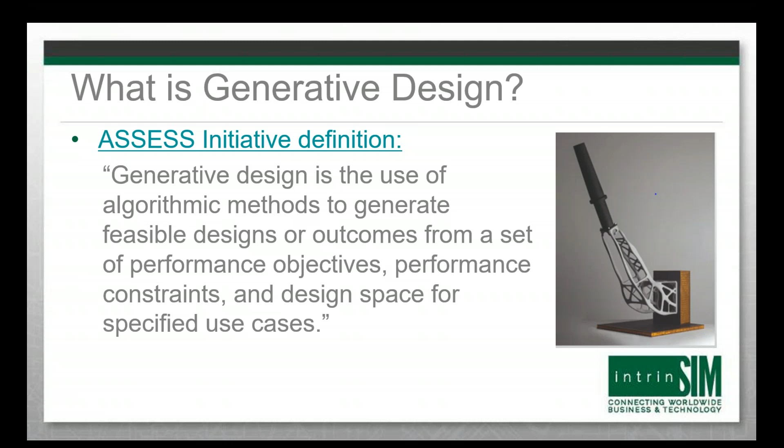The Assess Initiative goes on and describes that those objectives and constraints can include things from multiple areas, including performance, weight, mass, manufacturing, usability, aesthetics, ergonomics, and costs. I think ergonomics and aesthetics are a challenge yet to figure out how to quantify, but we see the whole aspect of generative design growing over time.

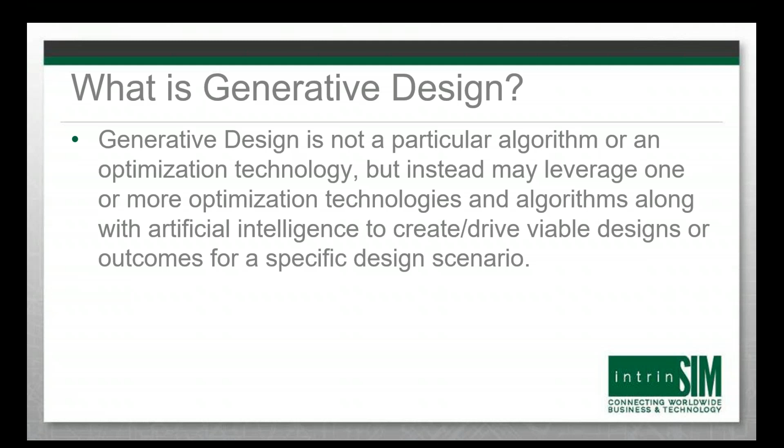So what's really important about the definition is generative design is not a particular algorithm or an optimization technology, but instead may leverage one or more optimization technologies and algorithms along with artificial intelligence to create or drive viable designs or outcomes for a specific design scenario. So what we're really going back to as a definition is the ability to algorithmically create designs given a set of criteria and a design scenario.

What this introduces is the possibility of a paradigm shift. This means that designs are generated by algorithms, so it enables exploration of a broader range of concepts that an individual would never have time to pursue. It enables generation of effective designs for different or multiple manufacturing processes. So it's actually possible to look at choosing the manufacturing process as part of the generative design space. It also enables significantly increased design innovation and performance-driven design very early in the design process, which dramatically reduces the design analysis cycles.

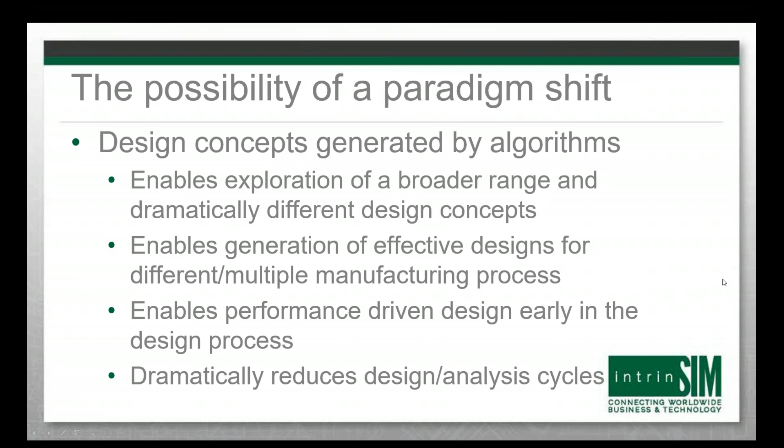This enables exploration of a broader range of concepts with dramatically different designs than we've worked with in the past, no longer minor tweaks of what was there before. So these things will reduce time, reduce cost, reduce weight, increase quality, and improve innovation, and therefore, by doing those things, improve competitiveness.

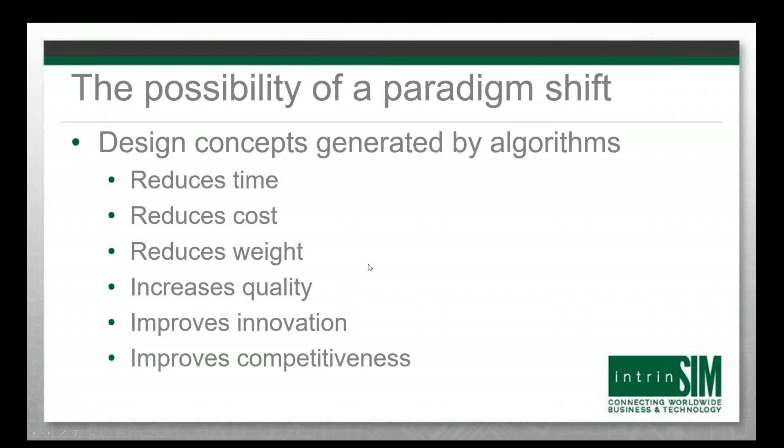So the Assess Initiative, working in collaboration with IntrinSim, has come up with a set of key capabilities necessary for software for general applicability. We're going to go through these in detail, but there are 11 capability areas. We've also come up with the concept of a capabilities assessment model.

We've indicated that if you're going to enable a paradigm shift, you have to consider organization and cultural changes. Due to time constraints, I'm not going to discuss those, that would be a webinar in itself. But let's acknowledge they're there, because if you implement generative design in a significant way, the roles of who's doing simulation and who's using it at what time will be changing, so it needs to be taken into consideration.

Who runs the generative design, for instance? So let's look through the different key capability areas that the software solutions need to provide, and that you need to consider as requirements, and what level of requirements your application needs.

So the first item is handling all appropriate objectives and constraints. Basically, the designer or design engineer doing conceptual design today is accounting for a variety of objectives and constraints without explicitly defining them to any software. To replace that effort with generative design, we have to be able to handle the same range of constraints and objectives that current designs work under.

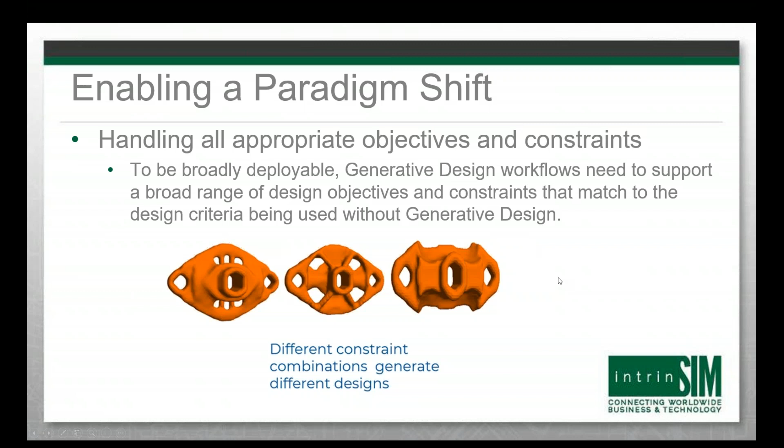The other issue we have to deal with is handling multiple operational or load conditions. Very rarely do we define anything that is a single load case. So generative design needs to intelligently work with multiple load conditions. It needs to be smarter than just adding in the material that any load case wanted, because that would be suboptimal. It has to intelligently manage the results so it accounts for the multiple load cases.

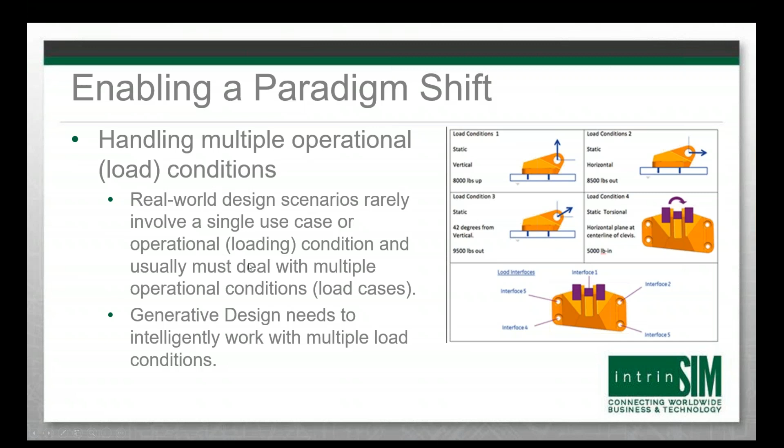We also have to handle all of the necessary physics to define the particular problem. To be broadly deployable, it needs to cover a very broad range of physics. When looking at generative design for your application, you need to understand which physics are necessary and make sure that the ones you need are actually covered by the generative design solution you're looking at.

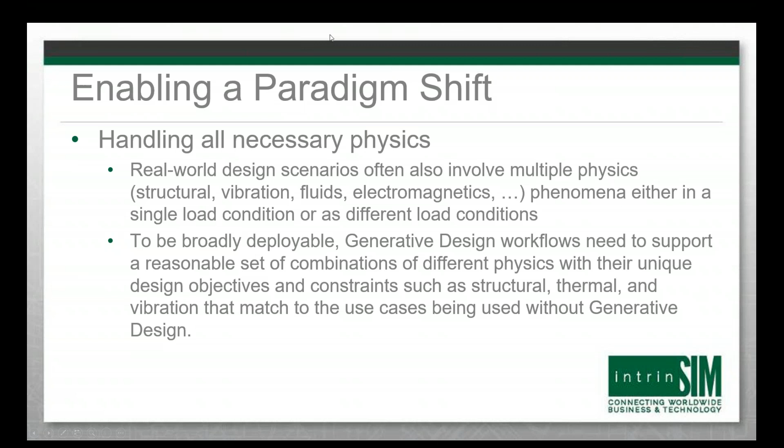Similar to load cases or physics, if you cannot cover them, then the designs you're generating are at best ideas to base things off of, and they're not directly usable as a design unless it covers the full range of what your scenario requires.

The other key item to enable a paradigm shift is handling multiple manufacturing processes. Everyone's enamored with additive manufacturing, and that opens up tremendous capabilities and options and innovation, but a significant amount of manufacturing today is still done with subtractive processes.

So we're really looking for things where the person running the generative design can choose which manufacturing processes are of interest and can compare different designs from different manufacturing processes. That would be the objective: to determine is there really a benefit for switching from a subtractive process to additive, or is it actually still cheaper to make this with subtractive manufacturing?

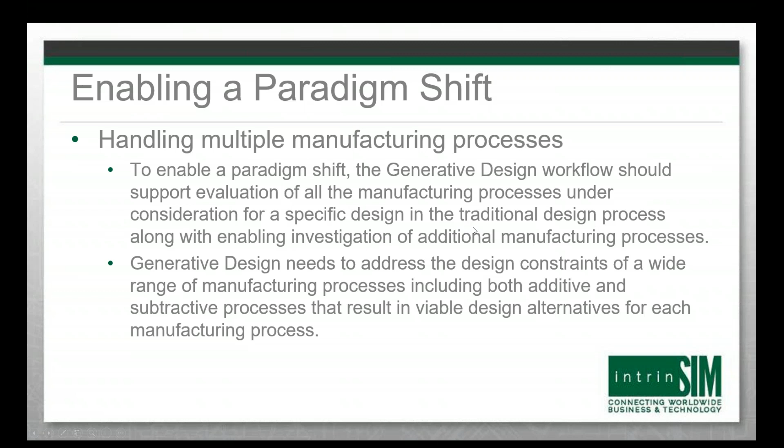And that brings up the other objective: to be truly effective and enable a paradigm shift, cost has to be accounted for in some manner. The actual number of parts you're making influences the cost, and we really aren't interested in generating beautiful, complicated designs we can't build because they're too expensive. So the ability to account for cost as a filter is a really important requirement to enable significant use of generative design, because that way you can compare the effectiveness of the actual manufacturing cost as part of the process.

We're also looking at handling generative design in an assembly or system context. This comes down to working at a component level and making sure you have the appropriate loads on the component that are generated from the system. This causes a limitation that requires a level of expertise to make sure the loads have been transferred correctly.

So you really want to be able to load at an assembly level and have the assembly work the loads down to the component you're working on. You also may want to do generative design of multiple components at once, because the load distribution will be a function of the stiffness, conductivity, or whatever the appropriate transport mechanism is for the physics you're looking at. It's very important to enable generative design at the assembly context, so you can load at the assembly level where it's more clearly understood what the input loadings are, and so you could actually do generative design on multiple components in the assembly.

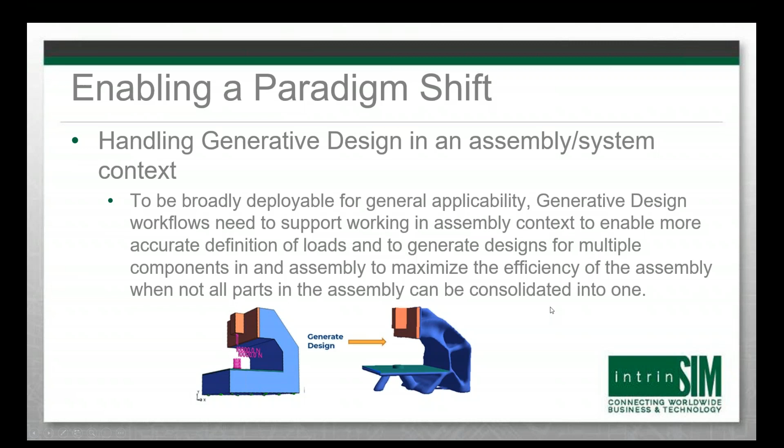The other key thing, if we're going to enable a paradigm shift with generative design, is the software needs to enable informed, comprehensive, and efficient exploration of the viable design alternatives. You should be able to look at a much wider range of design options than a human designer should be able to do, with efficient and effective tools to explore all the viable design options, with either single or multiple design objectives, so you can actually explore trade-offs from different constraints and objectives. We need to provide design exploration that's broader and more comprehensive than possible without generative design. The idea is to explore a broader space more efficiently.

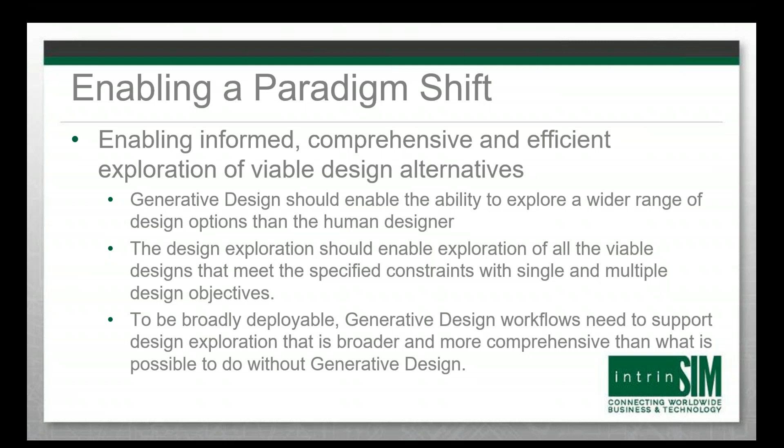That brings up the next key requirement: efficient selection. It doesn't do us any good to generate hundreds or thousands of possible design options from generative design. We need to find a way to work that down to a meaningful set, even though we may have described the problem such that there really are hundreds or thousands of viable designs. We need to include things like artificial intelligence or other approaches and filters so we can get down to a reasonable set of designs for the user to consider.

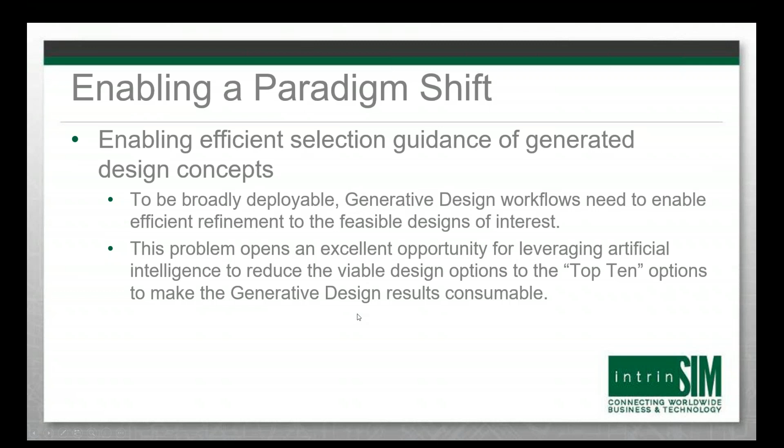Moving to thousands of designs does not save time, that just moves the effort to a different type of activity. So therefore there needs to be the ability to either control the number of designs created or bring them down to the meaningful designs so that quicker decisions can be made.

One of the key things is we expect generative design to be used in the early stages, the concept design stages or early stages of design, to be really effective. In order to do that, further validation, further detailed design, and further analysis is still required. So therefore, there needs to be an efficient and effective transformation to detailed design and analysis.

The ultimate goal is that transition is fully automated, so that not only the geometry comes along, but all of the loads, boundary conditions, the entire design scenario used for the generative design maps to the later stage validation and is capable for analysis at a standard finite element software solution. The idea is to enable that full transition, and the ultimate goal is for that transition to be completely and fully automated.

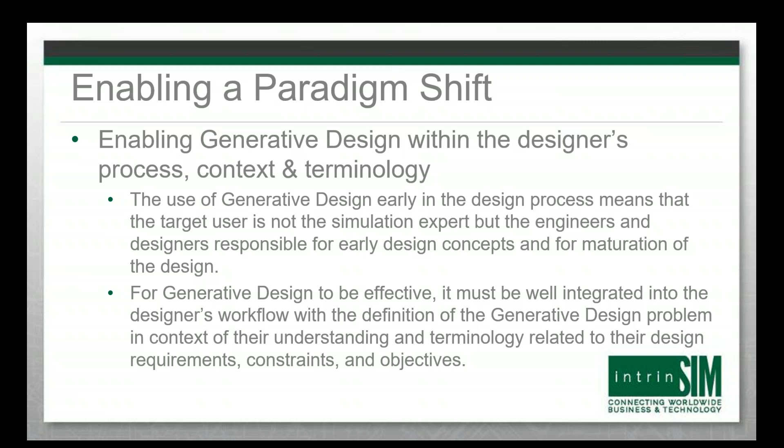The other key thing is, if we're going to move this earlier in the design process, the use of generative design means the target user is not the simulation expert, but the engineers and designers responsible for early design concepts and maturation of the design. So it has to be well integrated into the designer's workflow, or enable a workflow suitable for them, so these users actually have access to the software, are knowledgeable how to use it, and can leverage the data as an integral part of their design process.

It also needs to be broadly accessible, made available for all of those who might be involved in the paradigm shift. That means flexible licensing, easy access, easy setup. It needs to be available for a wide range of people.

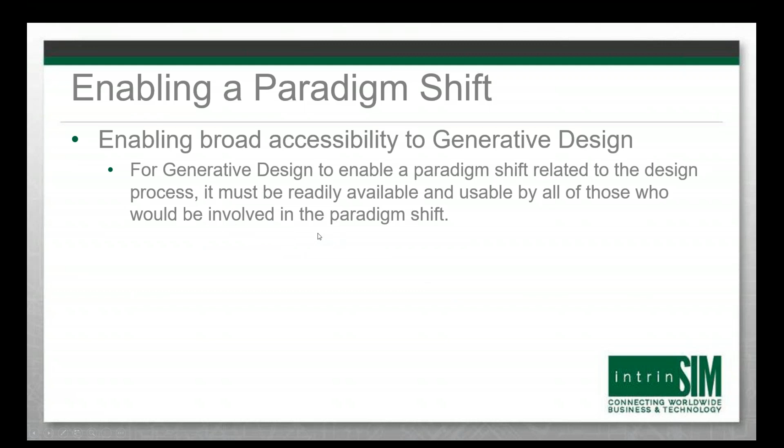So that covers, very quickly—probably a little quicker than I intended—the key capability areas required to enable a paradigm shift.

So in that process, IntrinSim and the Assess Initiative have also turned around. Once the capability areas have been developed, we actually developed a capability assessment model.

There is no generative design provider who meets the desired state of capabilities across the full range of required capabilities for all potential applications. Either they do everything required for a set of applications, or they do much of it, or they do it at a reasonable, functional level but don't capture everything.

I'm not going to go into details as to where Altair fits in this—they're going to talk to you about their software. What we are saying instead is there is no solution that offers generative design working across all capabilities at a perfect, comprehensive level for all potential applications.

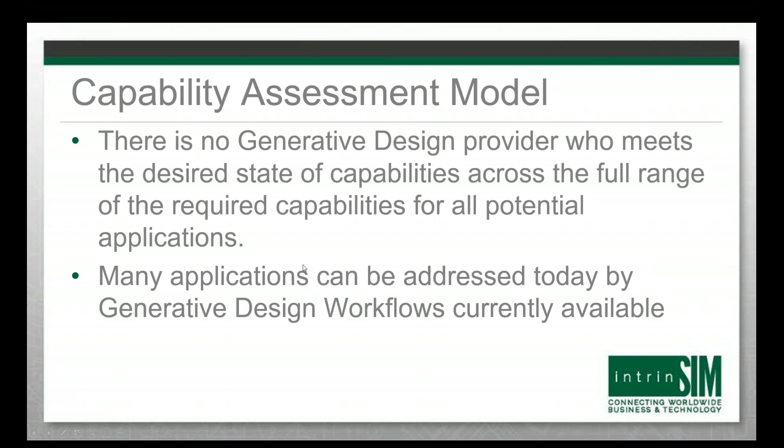So that's why we developed a capability assessment model, so we can determine where capabilities are and where requirements are. Many applications can be addressed today by the current workflows available, and you'll see great examples of that today.

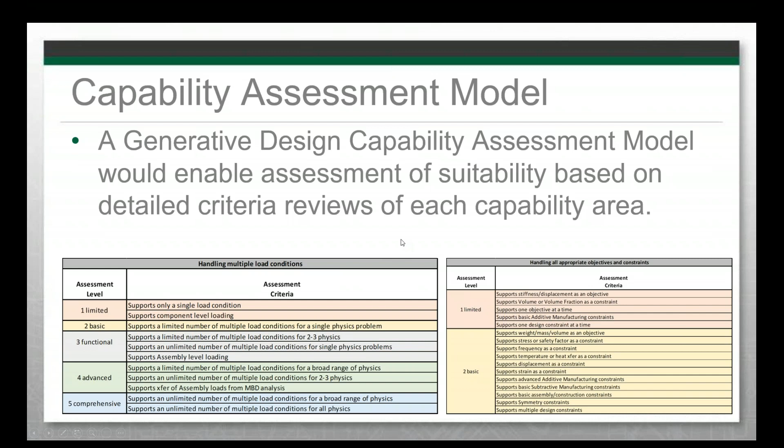Once the capability model has been created and assessed, it can be used to determine requirements for a particular design scenario. If you're interested in using generative design for a scenario, you look through all the key capability areas, checking physics capabilities, multiple load conditions, and how it matches against these criteria—then you do the same assessment, or have it done for you.

That indicates how a particular workflow handles the application. For a particular application, as shown on the right, looking at two applications, it's possible across all 11 areas to determine the suitability index, resulting in three states: one, clearly suitable, because the mean and minimum are acceptable.

The next state is possibly suitable and needs investigation—this is application 1's suitability, where the mean suitability index is greater than 1, but some criteria are not suitable and need investigation to see if they'll give you a problem. The third classification is clearly not suitable, where the mean is less than the desired 1.0 suitability index.

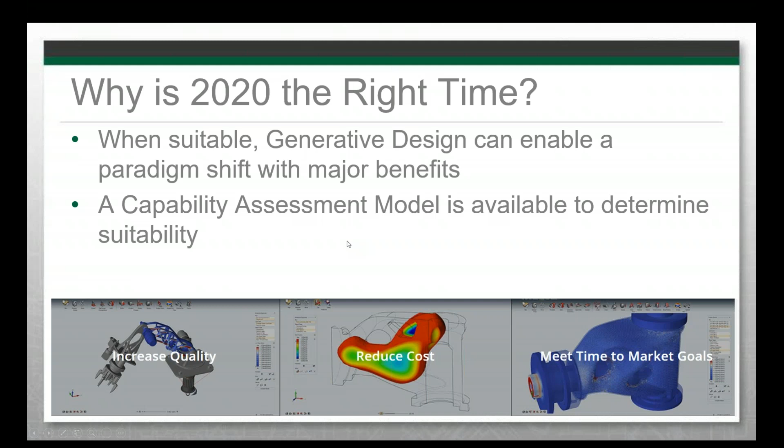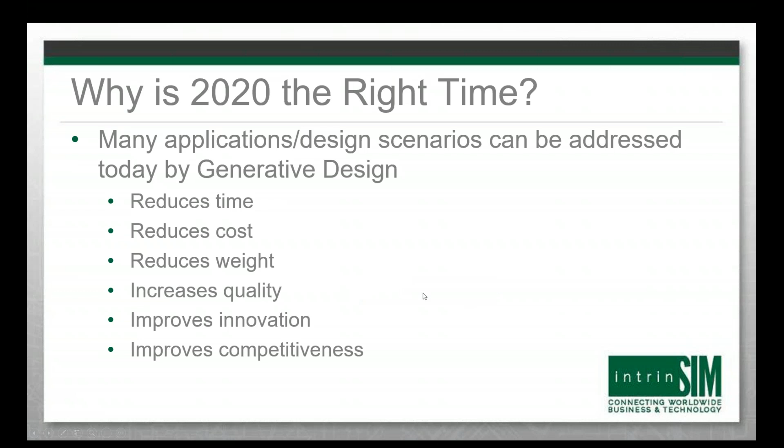Again, when it does work and is suitable, it will dramatically reduce time, cost, and weight, and improve quality, innovation, and competitiveness. So the business advantages are there to take the time and effort. The question is when it is suitable, and that's why a lot of effort was put in by IntrinSim and Assess to develop the suitability index in the capability assessment model.

Thank you. There's my contact information, and further information where you can get a document on a vision for generative design with much more detail. There's also a white paper from the Assess Initiative on understanding a generative design-enabled design process paradigm shift.

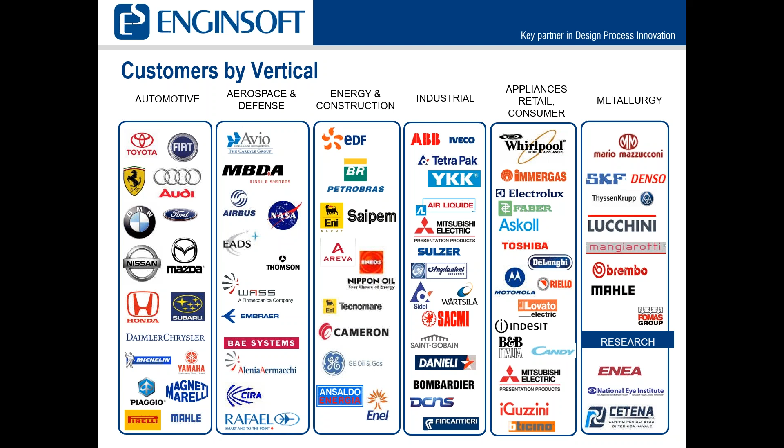The customers that EnginSoft typically works with are many of the company names that you will recognize throughout the world, although given the heavy focus in Europe, you'll see many of these are European based, but quite a few of them in the United States. You see a NASA logo on there and some others as well that are headquartered here. And this is because we focus exclusively on simulation, and this is one of the reasons that we have chosen to partner with Altair in the United States.

We do an extensive amount of consulting work. We have over 200 engineers and have completed over 4,000 projects over the 30 years that we've been in business. So there are not many areas of simulation that we are not familiar with. We do quite a bit with FEA, CFD, crash analysis, and of course, one of the leading areas that we're focused on is generative design and the 3D printing.

We are, as I mentioned earlier, a software partner of Altair, but we have customers in over 1,500 locations. What that allows us to do is when we come and talk to one of our customers about a particular topic, in this case about generative design, we're able to bring with us, with our engineers, expertise from where we have done work with other customers, what's worked, what hasn't.

So if we're going to be talking with you about the Altair products for generative design and topology optimization, we could easily reference the aerospace company in Colorado that we just helped with recently, whose name I don't have permission to use, or we can reference the Department of Energy customer with Altair that we have recently done business with, or oil and gas. So it allows us to bring expertise with Altair products to specific use cases at our customer sites. Our skills are in a wide range of areas. We do quite a bit with fluid dynamics, with, as I mentioned earlier, FEA and multi-body and high-performance computing.

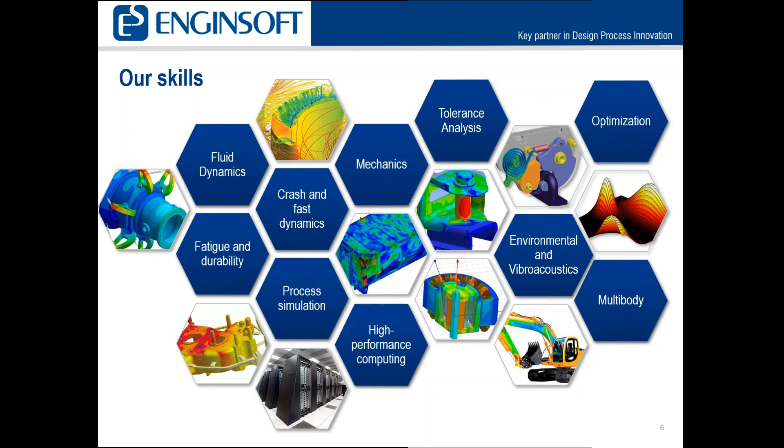Okay, so about Altair in the simulation-driven design for the topic of this webinar. I think Joe did a pretty good job of explaining what topology optimization is, but essentially, from my perspective, it's a series of mathematical rules, right? So it's an understanding of what is the mathematical rule that applies to the effect that's governing the shape of the particular object, and that can be something that is intuitive, and it might be something that is completely different.

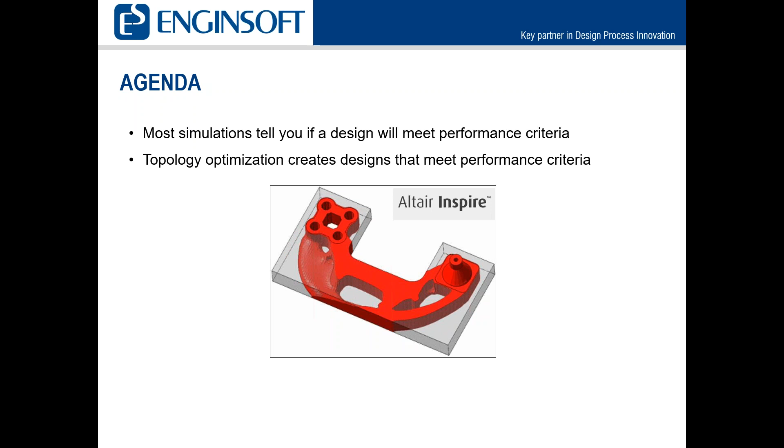So when we look at the Altair Inspire, the topology optimization is really about creating designs that meet the specific performance criteria. So before, we would do a design, and then we would go test that design to see if it would meet whatever the criteria is, and we relied very heavily on the best estimate of an experienced engineer. Now, of course, the experience of an engineer is still highly valuable, but what topology optimization allows you to do is to treat the performance criteria as the primary objective and then create the shape accordingly, keeping in mind the certain constraints that you may have.

Now, if you trace that back, some of you on the phone have been an engineer since the 80s and the 90s, right? And so, you did a lot with the 2D and the 3D. And of course, you were basically starting with some type of a design, and it was generally iterative from whatever your company was manufacturing. You're going to do the next version of it, and I might make a very slight change to a particular device, but I have to keep in mind my historical manufacturing methods and how I could alter that particular shape and still not impact the overall effectiveness of it.

As we got more into 3D CAD in the 2000s and 2010, we could do a lot more with the post-processing for simulation, but now we're getting into simulation-driven design. And Altair is at the leading edge of simulation-driven design. And what that means is that we are able to lead with simulation, because if you change your thought process, I don't really care about what a product necessarily looks like unless I'm in the marketing department.

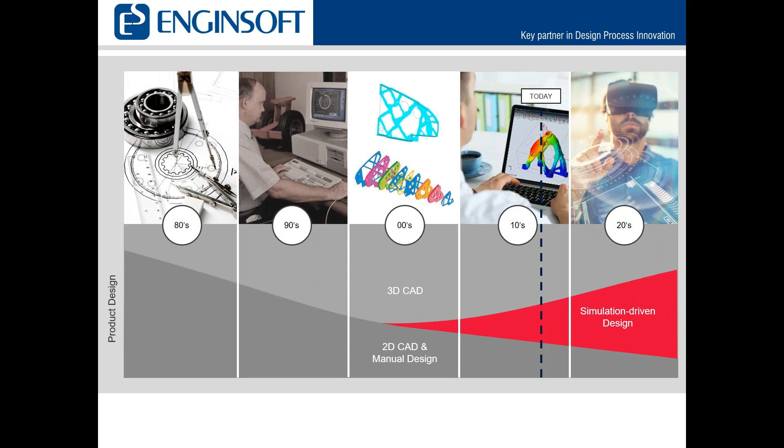What I care about is what is the functional characteristics of that product. How do I make sure that it performs the way that it should? That means I'm going to lead with simulation and then create products that meet that requirement. So Altair has been enabling simulation-driven design as a company because they are heavily focused on the manufacturability.

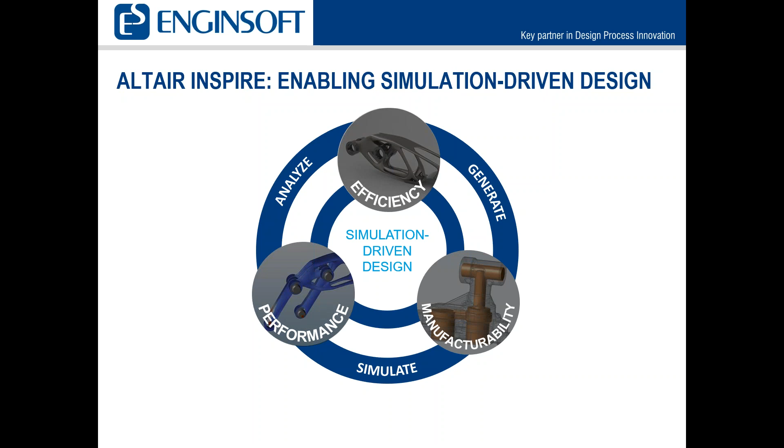I know several of you that I've spoken to on the phone in just preparation for this call, talking about manufacturability means that we're going to design something that we can actually manufacture, be that a 3D print manufacturer, be it any of the other manufacturing techniques. Okay. Altair's leadership in the market is not just based on generative design, but also on the other product set and understanding where they're able to apply that technology.

And so you've got some videos on the right showing that, okay, here's my generative design, but I'm going to take into account manufacturing methods in addition to the additive manufacturing. But this is just one part of an overall suite of products where Altair is leading with simulation. And so we're going to allow for the other engineers on the phone to do a better job of doing a demonstration, and particularly of the generative design products. But you have to keep in mind that these are part of an overall family.

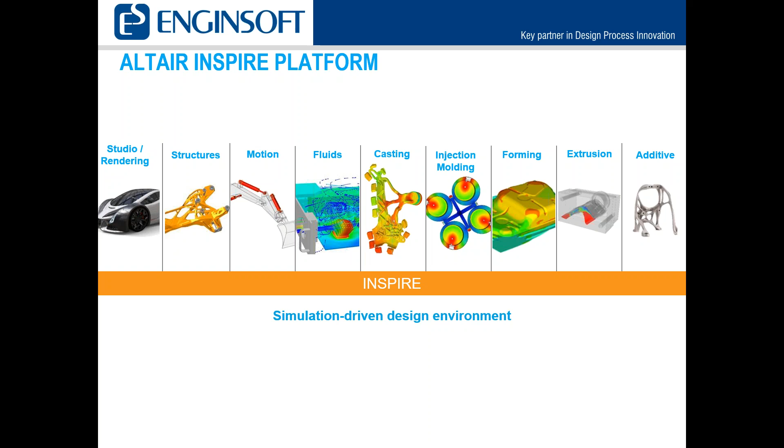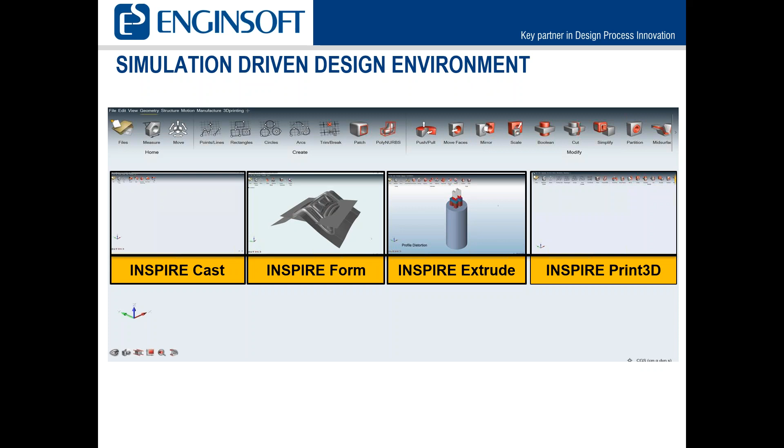And that overall family, because of the licensing structure of Altair, you can have access to these other tools. And for some of these people on the phone, this may be a bit unique, so I'll just go into it briefly. But if you take a look at the interface with the Inspire line, you're able to access all of the different products here because the licensing model that they use is one that's based on a unit-based license. So it's access to the suite.

Like a lot of software companies, you would just go buy one particular piece of software and you might use it for a couple of days this month and then next quarter use it for a couple of days. Think about this more in terms of you're going to get access to the suite of products and be able to have access to all of the different tools when you need them. And that's the advantage of the Altair system.

I've got several people from Altair on the phone that are going to do the demonstration, so they might yell at me for this one, but think about it: instead of buying Microsoft Excel and Microsoft Word separately, you bought the Office suite and you're using Word or Excel when you need to, right? And so I like to use that analogy here. Altair with Inspire is providing a unit-based licensing that gets access to the suite, but is priced for value, okay?

And I believe that is my last slide. So with that, I am going to turn the presentation over and you guys are going to see some more details on the products in particular. Evan? Yep, I'm ready. Beautiful. Can everybody see my Inspire window here? Sure can. Awesome. So thanks, Joe and Chris, for the introduction.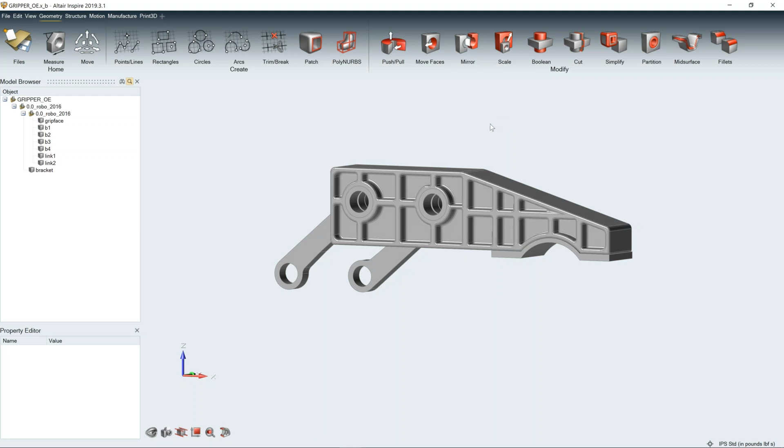You'll see here I've got a small assembly of 8 to 10 parts, something that might be a motion mechanism or something I could just simulate as a static analysis. So for the sake of this simulation, we'll just set it up as a static analysis. And we'll want to change this piece here highlighted in yellow. This is going to be the shape that we're going to use the generative design or the topology optimization to change. So up at the top here, you'll see the structure of all of the Inspire tools, whether it's this one or any of the manufacturing tools.

It has this ribbon structure where I can click through different sort of workflows that are already built in for me. So we'll start here with the geometry ribbon, and we'll start doing some simplification on this geometry to build it up for optimization. We want to give the solver an ample amount of package space, what we call design space, in Inspire to design. So I'm going to go ahead and use this simplify tool, and I'm going to fill in some of these holes and pockets that were cut out in this geometry.

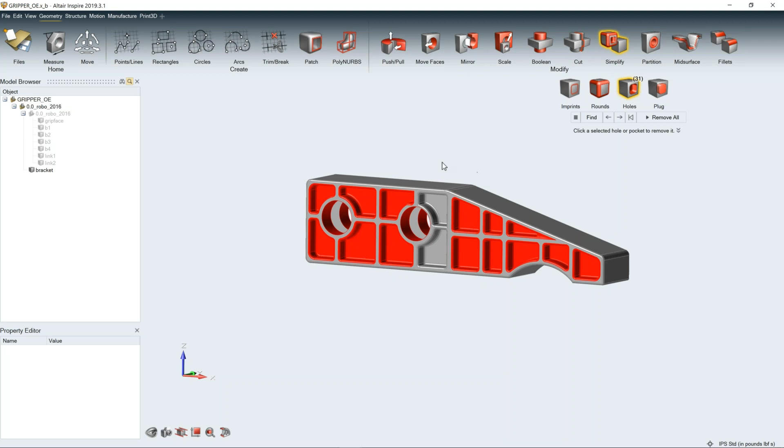I'll actually go ahead and isolate this part. So I'm just looking at the one that I want to simplify. And then I'm going to click holes, and it's going to automatically search for holes in this geometry that I can fill in. Inspire is really built around being intuitive and useful for designers and people that are familiar with CAD products, but maybe not as familiar with analysis tools.

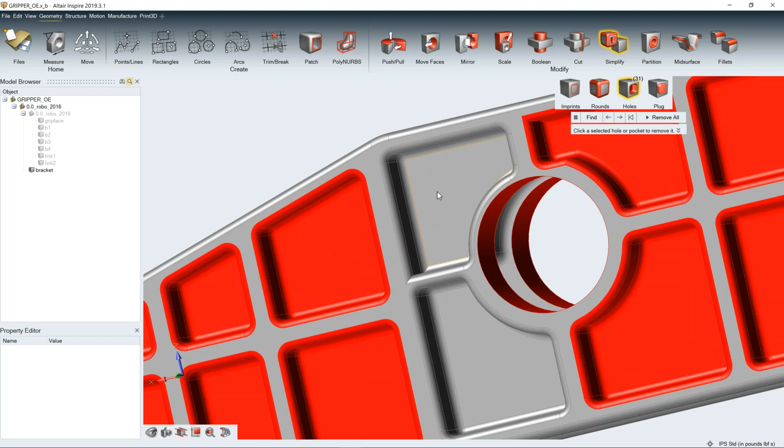So you see here all the things that are highlighted in red, it'll fill in for me if I accept them. But it missed a couple of these little pockets in the middle for some reason. So I can go ahead and just double click and grab some of those faces and fill them in on their own. I just add all the little fillets in as well. Make sure we get everything that we want to fill in and nothing that we don't.

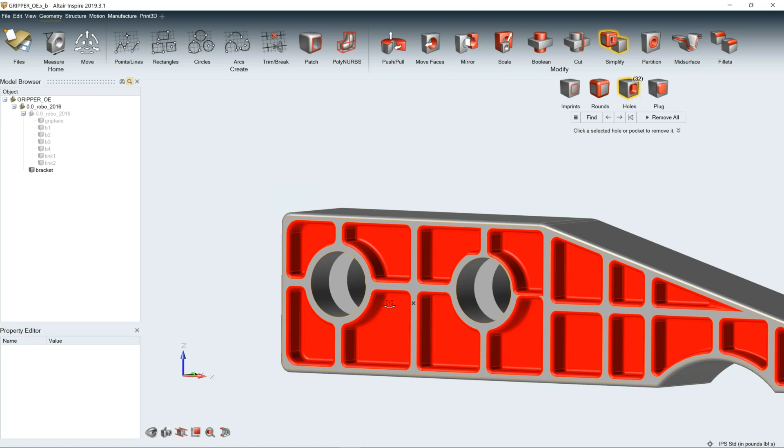So it's really quick and intuitive just to click through and kind of pick up the faces you want to remove. And then obviously these ones I want to keep for these where these bushings are. I'll just do a control select to get rid of those. So all the faces in red will get removed when I click remove all and filled in automatically. Now I've got a much bigger package space, a really free design space for the optimization solver to work with.

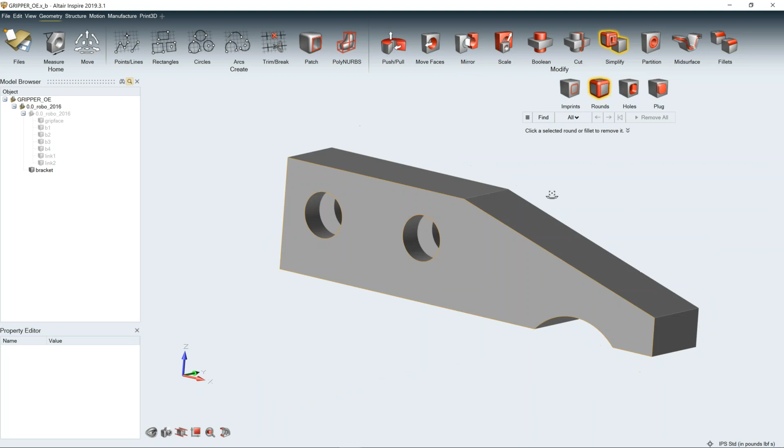I can do the same thing with all the fillets and rounds in the model just to give square edges for a little extra space. Again, that's 2 clicks and it'll automatically remove all of the fillets. And then I could enter into a push and pull mode and maybe pull some of these faces out, to give myself a little bit more geometry to work with as well while we're doing the optimization.

So really quickly, that's the geometry tab in the workflow and some of the tools that we use pretty commonly to clean up geometry and prepare it for optimization. All I have to do is set this geometry as a design space, and it'll show up in this maroon purple color, and that's just telling the solver that that's the part I'm going to optimize when I click run. That's the geometry I want you to change.

So moving on, we'll actually set up the boundary conditions and the loads and constraints. So in the structures ribbon, everything is, again, working from left to right. So the workflow is really easy to follow and built in for you. And you'll see a lot of these tools highlight yellow in different areas as I hover over them. And that's so that we don't have to click through a bunch of menus to get to a specific tool we want. We just have to know exactly where to click.

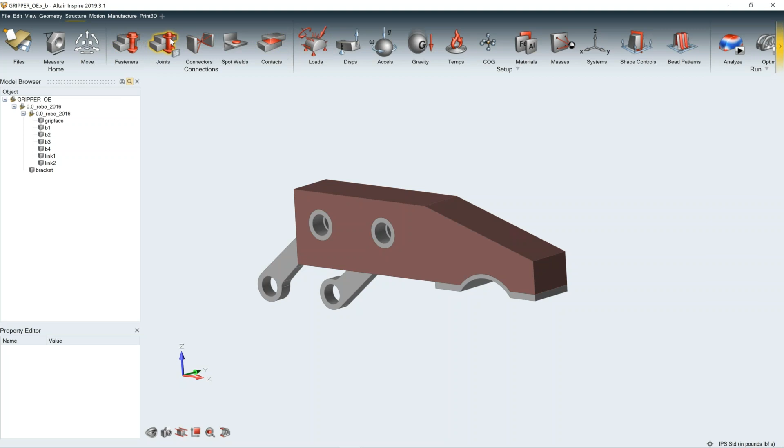So really one click to apply a different boundary condition doesn't require me to click through a bunch of different menu files. So I'll go ahead and click the joints icon here because I have some joints that I want to add into this simulation. You'll see, again, it's automatically going to suggest some joints for me, and I can click to accept, or I can go back and find them on my own.

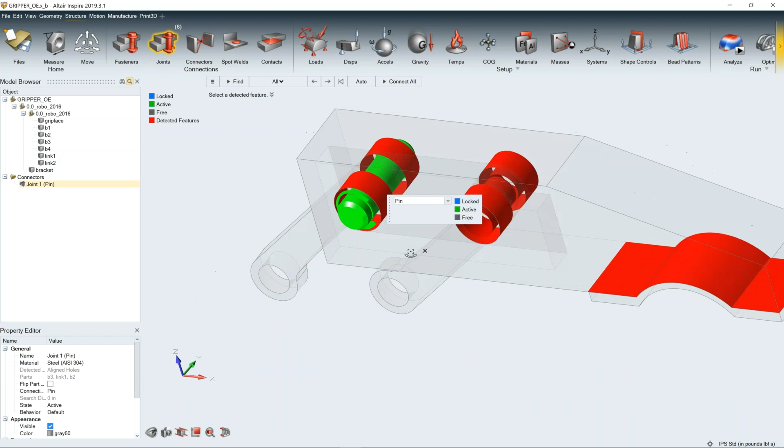But what I'll do is just use the ones that it automatically finds, these concentric joints, concentric holes here in the middle, and automatically click to add a free pin. And I can do the same thing with this other hole. There's another free pin. I can change that condition as I see fit.

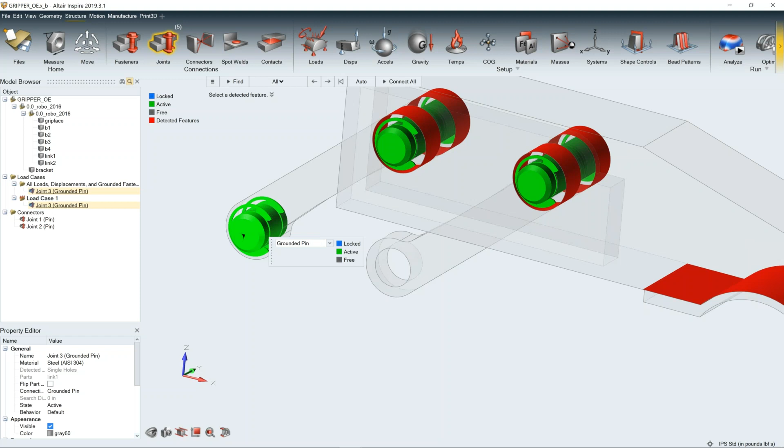I can also find my own if it doesn't find a feature that I want to use. I can click this single hole down here at the bottom and add a grounded pin. Grounded pin will just act as a fixed point that will allow rotation, whereas these free pins are allowed to translate and rotate.

I've got some boundary conditions set up. I'll go ahead and use this loads tool to apply some of my other boundary conditions that aren't joints. So I can click the apply a support icon and apply a support to any face, edge, or point on the model. And I'll just click this face here in this other joint so that we have a fully constrained model now. Now this is locked in rotation and translation, and then the other joints are allowed to rotate with the grounded pin being grounded.

Now we're ready to add some loads to actually drive the stress in the model that will drive the optimization shape. So I'll click the forces icon, which again is a part of this 4-part loads icon. I can click any face, point, or edge to add a force to, and you'll see the face that force is applied to highlighted in red. And these little micro dialogues pop up a lot in Inspire to really help you along the workflow as well.

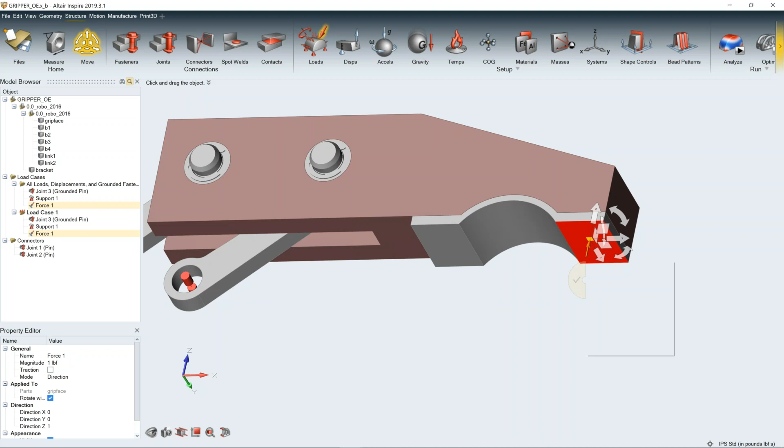So I can quickly align these with the X, Y, or Z axis, or I could even use a movable triad to rotate in a certain direction that I want. And I can really quickly type in any unit system into here, and it'll convert to pounds. If I'm not working in pounds, or I know my measurement in a different unit, I can just convert it right there. We can quickly apply loads and torques and pressures and things like that to any face, edge, or point along the model.

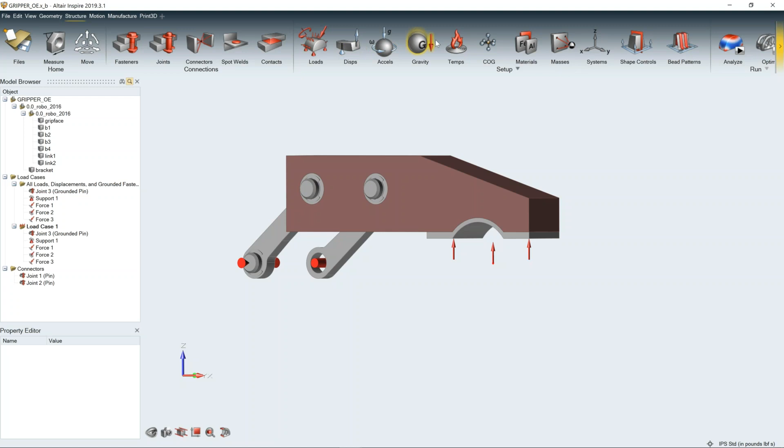Now I'm all set up with a fully constrained and a loaded model. And there's tons of different capability within this Inspire tool for how to load and constrain your model. So it's not just limited to these basic constraints that we just added. But for the sake of time, these are the easiest to show off, and I think the most intuitive.

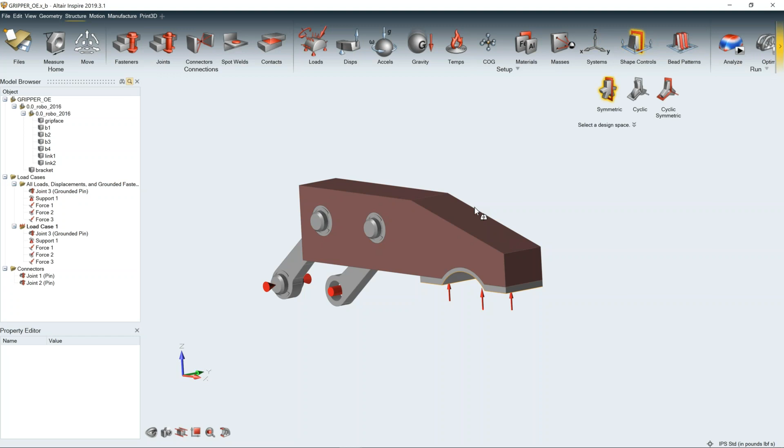One of the most important things about Inspire and its workflow for design for manufacturing is this shape controls button. So I can quickly add these shape controls to this design space. What this is going to do is actually tell the solver how I want this shape to look at the end of the run. So these are symmetry planes, for example, and I could say turn off these two because I know I want this part to be symmetric about this plane. And that'll drive the solver to make this part symmetric about that plane.

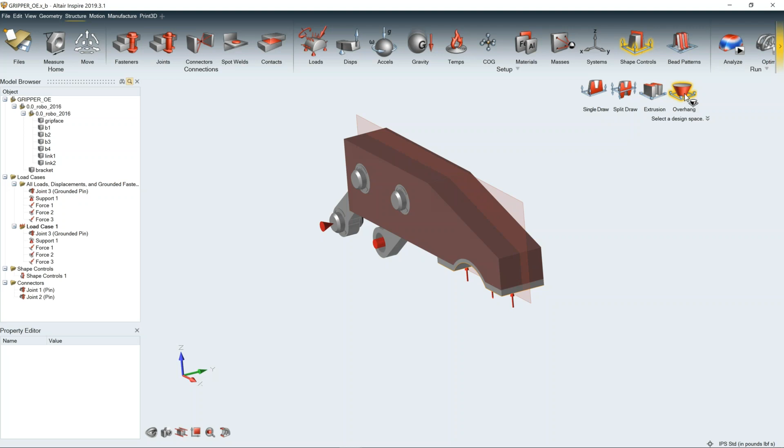Or I can use these manufacturing shape controls, to say I know how I'm going to manufacture this part, so I want you to optimize it with that in mind. And the one we'll show off here is this overhang constraint. An overhang constraint is going to say I'm going to print this part in a certain direction, and I want you to optimize the overhang angle in that direction.

So for example, if I were going to print it here in this orientation, and I know my printer can't handle anything under a 45-degree overhang angle, now the optimization is going to give me a shape that can be printed with the minimum amount of support structure in this direction. So it'll optimize for print time and support structure volume once you're done with the post cleanup at the end. And we also have these for a split draw or single draw for a casting or molding, or an extrusion as well for a two-dimensional profile.

And now we're all set up for an optimization, and we can just go over to the tool here and press run. We can set a different objective, we'll set a different volume we want at the end, or we can actually set a stress target as well if we want to do a minimized mass run. So there's tons of different objectives in here, and we could talk about the different types of optimization until we're blue in the face, but for the purposes of today, what we'll run is a maximized stiffness run, which is going to give me the stiffest possible result with only 20% of the volume remaining of this purple shape. That's the run we'll take a look at in the next model, and then I'll pass it off to Sean.

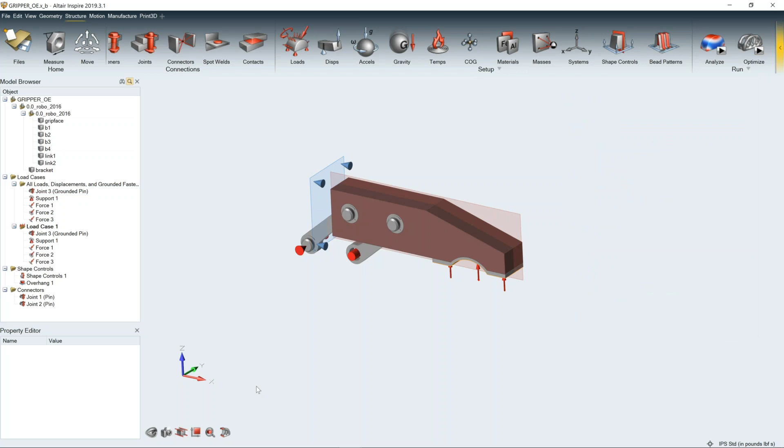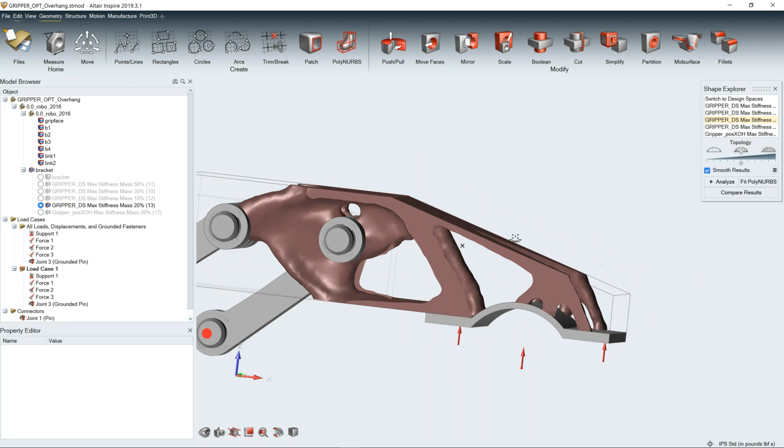So here's the result of that run we just set up. This is the exact same model, just already ran in the background, and it took, I think, about 15 or 20 minutes to finish. You'll see here, this is what your standard topology optimization design would look like. A little bit rough around the edges, just due to the process of removing elements and element densities. But we've added some features in Inspire to smooth these shapes out so you can export them, and they look a lot cleaner. So you see there, I'm just toggling on the smooth results button.

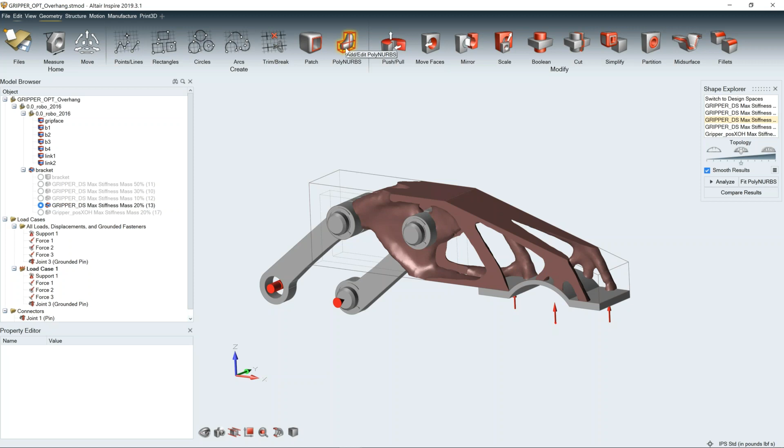And then one of the really interesting parts about Inspire in this post-processing world is this polyNURBS button. So polyNURBS is going to allow us to take, as Joe mentioned, that transition to a detailed design from a result. So I can use the polyNURBS tool and all of the tools that are underneath this taskbar to wrap this geometry in a clean solid.

So for example, I can just kind of click between faces and wrap this geometry all around, or I can build it kind of piece by piece. I can build on top of a face in a certain direction. And I can also snap and move any point or edge or face in this model and kind of build it almost like a clay model.

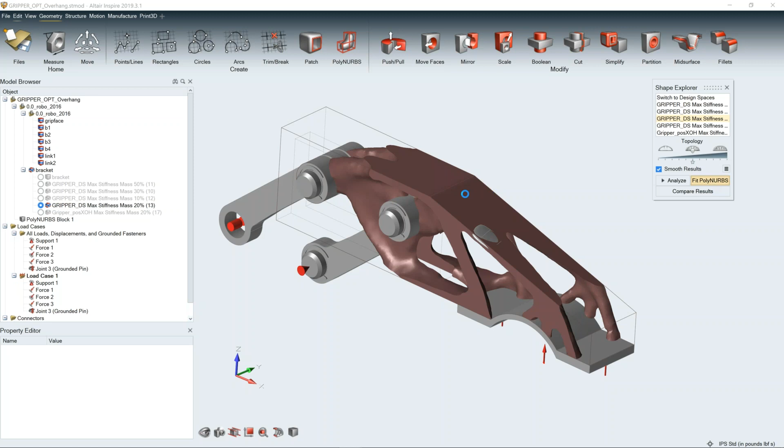But in addition to that, we've added in the new versions what we call polyNURBS fit, and that's going to automatically wrap this shape in a polyNURB. And you'll see it follows the underlying geometry, so it's a little bit more broken and less smooth than if you built it on your own.

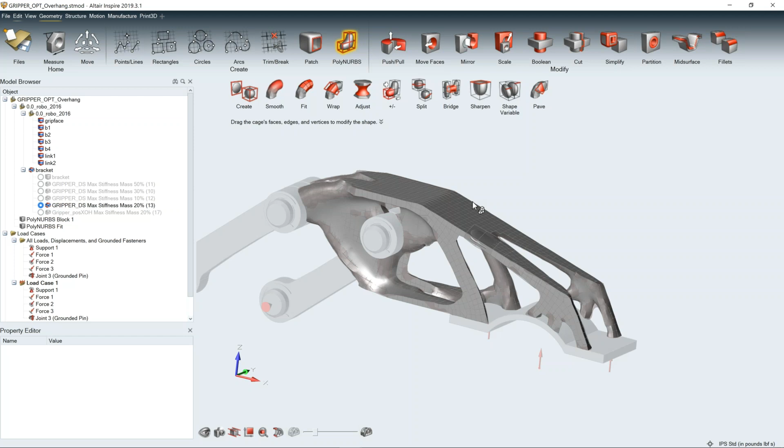But what you get out of this is a watertight solid that you can take into any other tool, it could be a print simulation, or take the Parasolid file right out into a printer or something like that to set it up for your manufacturing simulation. So you've actually got a watertight solid in 2 clicks of your optimization result, and you can do with it what you wish and edit this with our polyNURBS tool as well. That was a quick walkthrough of optimization and post-processing, and I'll pass this result on to Sean for 3D print simulation.

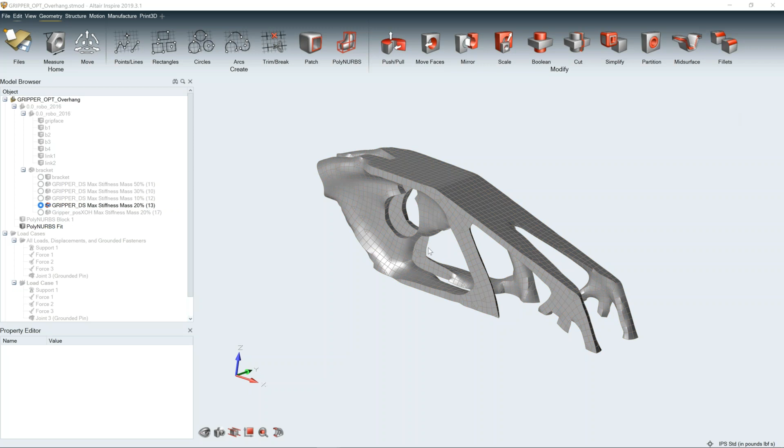All right, great. Thanks, Evan. Appreciate you going through that. While you're passing that over to Sean, there is a quick question from Corey. Hi, Corey. And that is, what import options do we have?

We can import anything, any normal solid file. Sean will show you here too. Any STEP file, SolidWorks file. I think the only thing we can't do is SolidWorks current model year. So like a SolidWorks 2020 file is something we can't open. Okay. And that gets updated with the new releases. So the next release will support the latest version of SolidWorks. There's usually about a three-month lag in the new releases to when we fully support those.

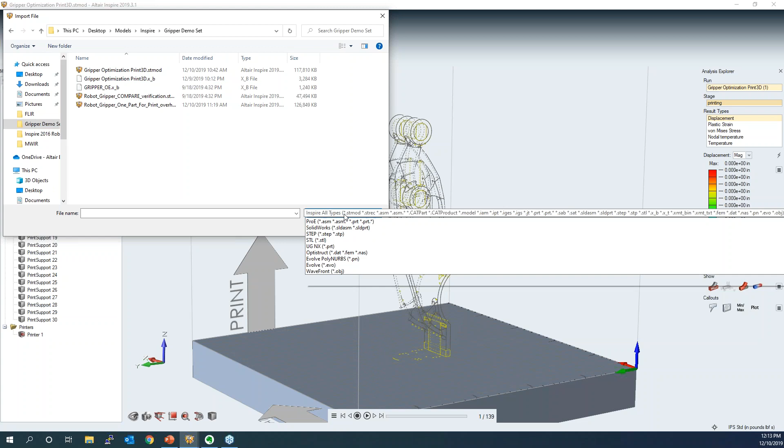And an STL? Yep, absolutely. We can bring in STLs. On top of that, you saw that wrapping capability that Evan showed. You can bring in an STL and auto polyNURB that as well. So it's certainly something that is very beneficial for the additive manufacturing space, and I highly recommend trying it out. That's been updated in the most recent Inspire release.

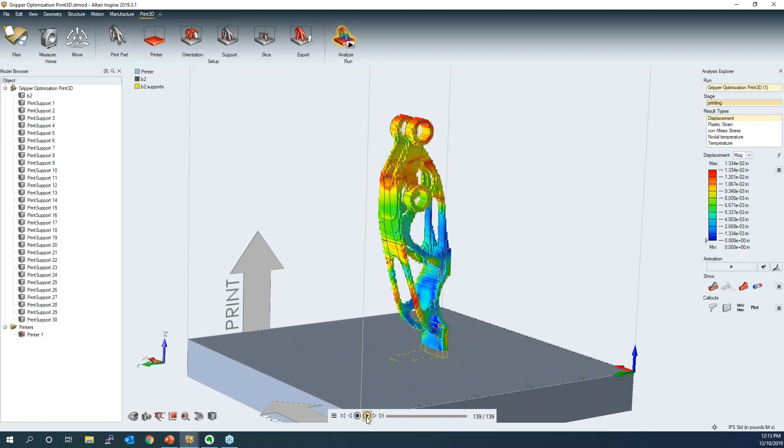So I'm going to take a second here and show you also the other brand new product called Inspire Print 3D. So picking up where Evan left off, we now want to run that through a build cycle and simulate what the build process looks like, understand what the thermal and residual stresses are, as well as any deformation that is caused from the printing process. So in this example here, you can see we've got that bracket. We can determine, yeah, there's a little displacement at the top. I'm going to show you how to set that up using that same workflow, working our way left to right in the Print 3D tab.

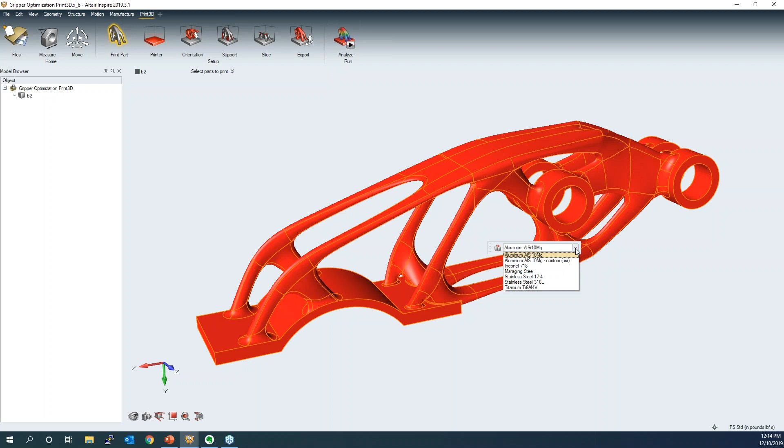So let's start here with just the bracket, and we'll go into the Print 3D tab and just say what part are we printing. Now here I just have one part, but if you have multiple parts that you're trying to nest on a build tray, you can put in as many parts as you'd like. You specify what the material is. We have a few default materials right now for titanium, aluminum, Inconel, and just move to the next step here, which is defining what you're printing this on.

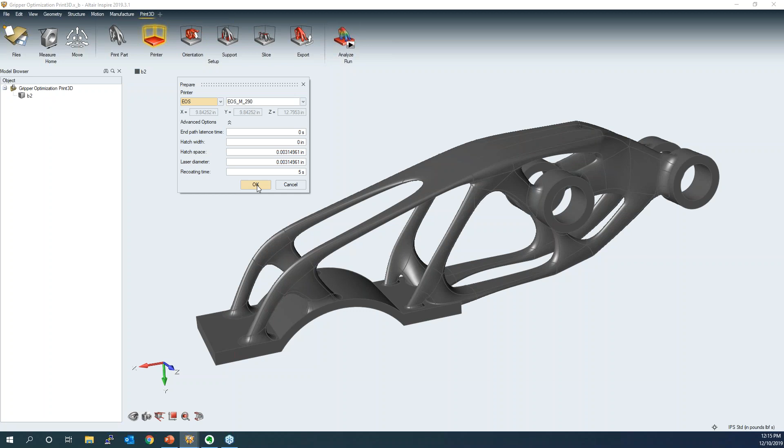So the default printers that we have are EOS's M290, the 400, the 400-4. We've got Renishaw machines in here and SLM machines. If you're using other machines, let us know. We can certainly help you get those set up. But that's all defining hatch width, spacing, the diameter of the laser, recoat time, and so forth. So when you've selected the printer, it knows what the print dimensions are, and it automatically tries to put that part right there on the build tray for you.

So we're going to the third step here in the process, which is to orient this part. When we orient a part, this is going to identify where the support materials are going to be and help us identify what's the best way to place this on the build tray to create a design that is using as little support material as possible, as well as understanding what the print time may be.

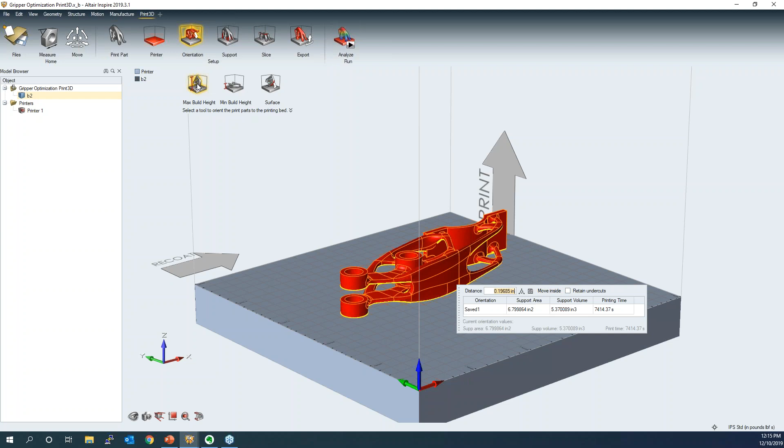So here you can see I've got this box that pops up, and I can save this initial position, and it's going to tell me the support area, the volume of that support, and the estimated print time. I could select max build height, and it's going to reorient it, figure out the maximum build height, and update that. You can see the overall support area has decreased, but the volume of the supports has gone up.

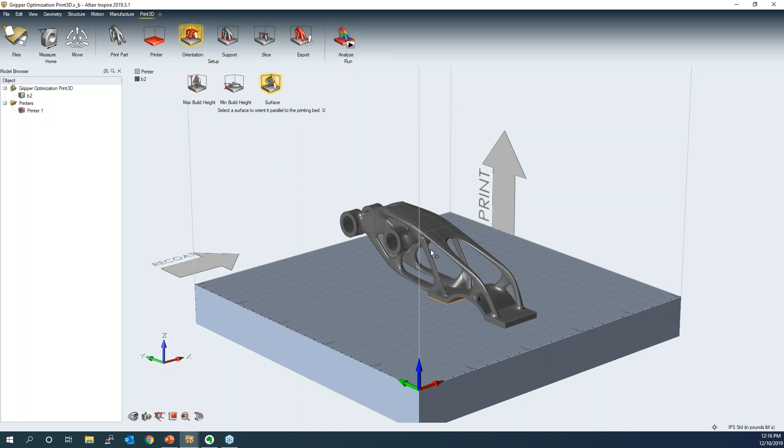Or I can just specify a surface that I want to orient it to. So I could say I'd like that to be the surface, and once it comes back with the results, it will identify the undercuts and show me the support area, volume, and so forth. I can click back in any of these to return to that previous orientation.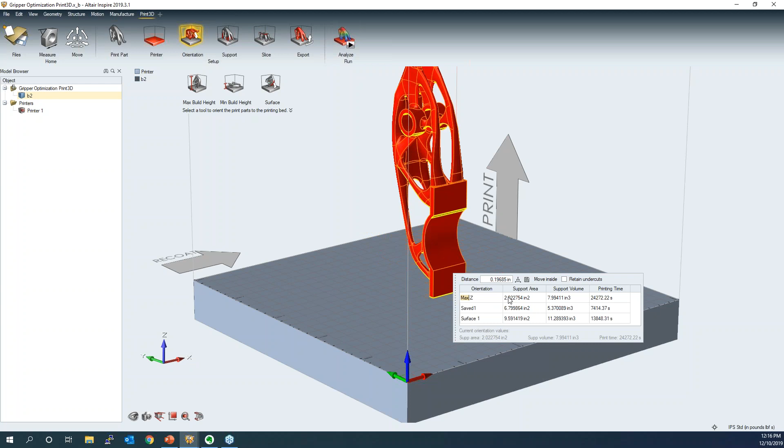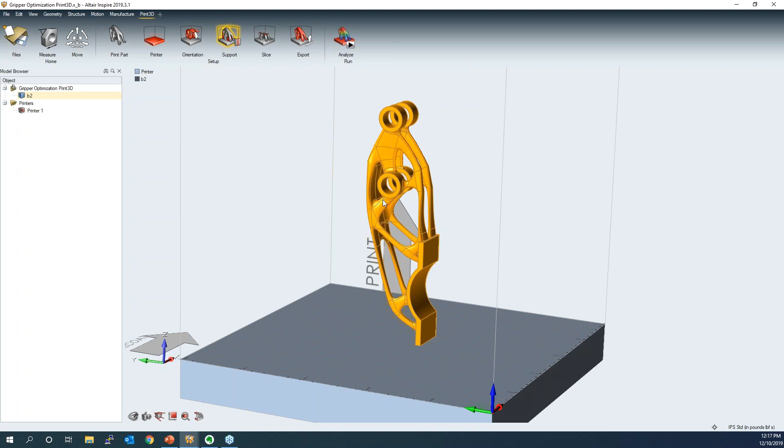Let's say we want to use this max build height as our default printing method. So I'll accept that, and move to the fourth step, which is to actually generate the supports. This takes a couple seconds, but what it's doing behind the scenes is calculating where all those undercuts were, and automatically creating the supports for you. You'll be able to modify and adjust those supports as needed. It does take a second because it's creating a bunch of geometry in the background, but it'll allow you to specify the types of supports you want to use, as well as how those supports are connected to the actual part.

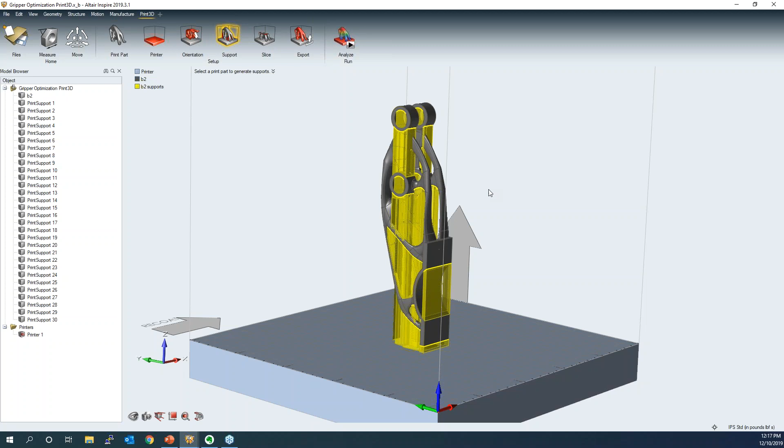So here you can see it's come back with the supports, and I can now make modifications to any of these. One of the biggest advantages of Inspire Print 3D is that these supports are tied to the underlying geometry. I could always go back earlier in the process, make modifications to the design, and the supports will automatically update based on those changes. It's a complete workflow, fully connected.

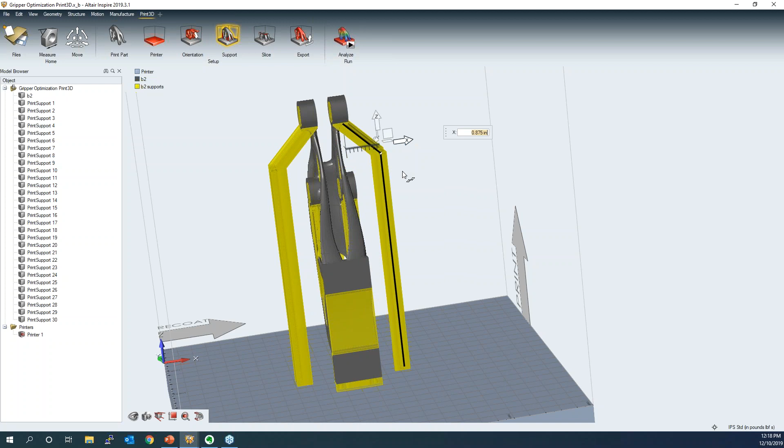Let's say, for example, I want to move this support and make it more of a tree support. I can simply come over and move this. It automatically keeps my build angle. So let's go to the other one over here, and say I want to move that one out as well. And maybe turn this into more of a pin support instead of a solid support.

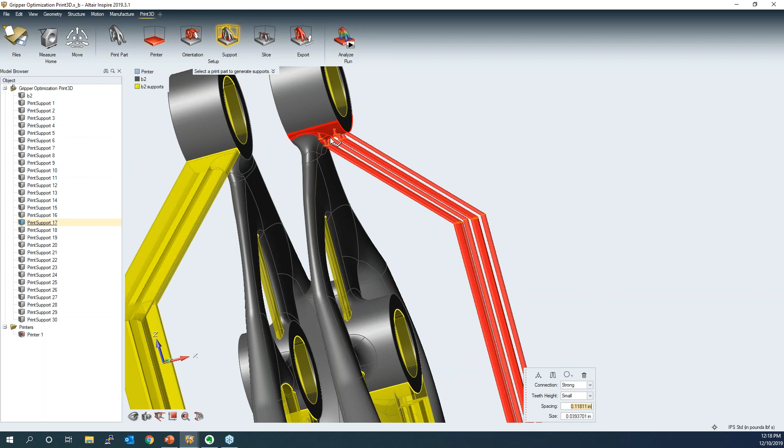You can see here we specify what type of connection, and that's defining, on the teeth, how tight the connection is. So if I change that from weak to strong, you can see that has increased the teeth size. You can specify the spacing, the sizing, and do this for pretty much any of the supports you want to simulate.

So at that point, once you've got your supports defined, you can come in and look through the slices layer by layer. As I scroll from the bottom to the top, I can look at any of these layers as I'm going through here. And then I can export that as an STL file.

In the next release, we do expect to support the CLI format as well as other 3D print formats in the future. Right now, we write out the STL for the part as well as the 3D supports.

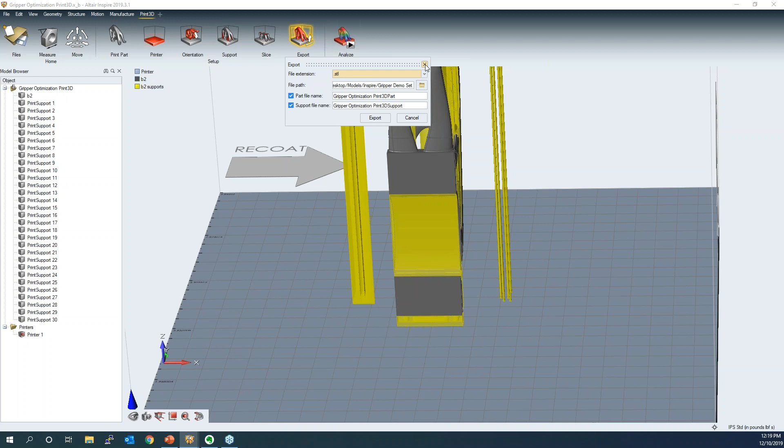And then we want to simulate that. When we simulate this, we're doing a full thermal mechanical simulation. We can do it by layer. We know the velocities, the powder thicknesses. You can specify all these printer parameters, and it comes up with the default print for you. Then you can either specify whether you want a more accurate simulation—it'll take much longer, with finer resolution—or a faster simulation. And then just select run. Now this takes about 10 minutes to solve.

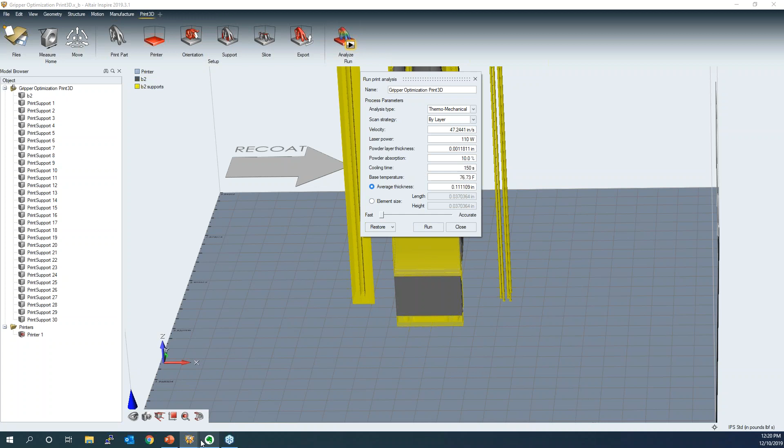So let me go to one that I had already finished here. And what you'll see as we're going through this is the first step of the process is the printing. So it goes layer by layer until it gets to the top.

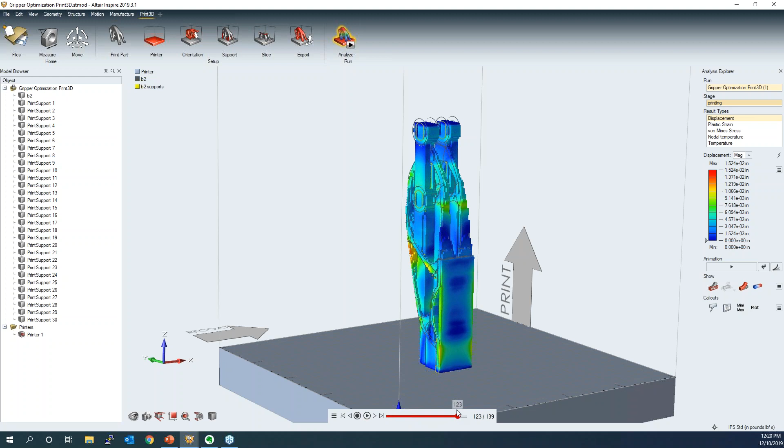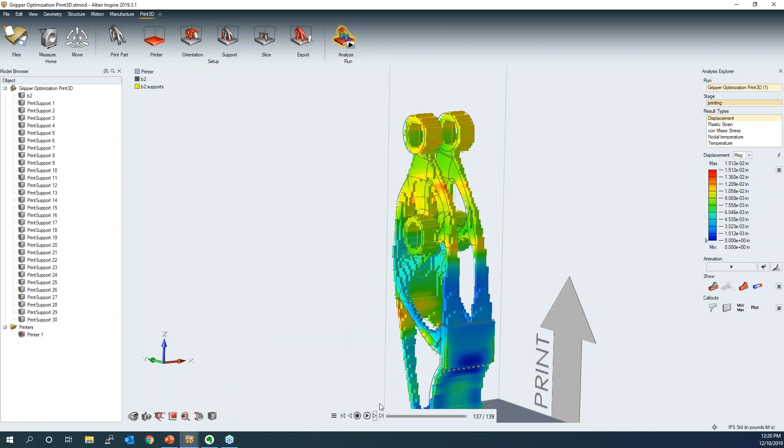Once we're to the top, now we go into a cooling cycle, so it will cool the material off. And in the last 2 frames, we're going to actually remove the supports. Then in the next 2 frames, it springs back. So in the last frame, we actually see what the spring back is after all the supports have been removed and it's off the build tray, and we can see the amount of deformation and where it's deformed.

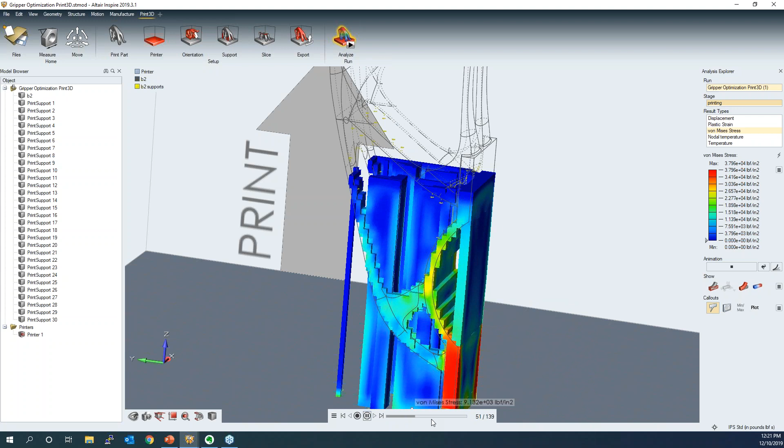We can also look at things like plastic strain, von Mises stress, so understanding where the stresses are in this component after printing. We can put on callouts to understand what the hot spots might look like, where our min and max are, and we can show that min and max while it actually prints, as it's changing.

Look at nodal temperatures. Understand all sorts of information about the print process. And if you have too much deformation, it's very easy to go back and make changes to either the support mechanism, the orientation, or the design itself to get to a good part before you actually put it in your machine. If you simply eliminate making one mistake on a design, you've paid for the software itself.

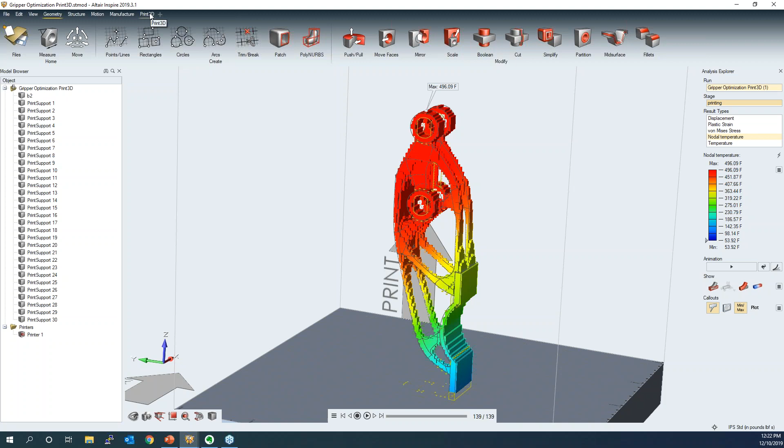As Chris pointed out earlier, this product is fully integrated, so you can do the optimization, the structural analysis, the motion, as well as the simulating of the 3D printing. So with that, I'm going to pass it over to Chris to wrap up the session today and take any questions.